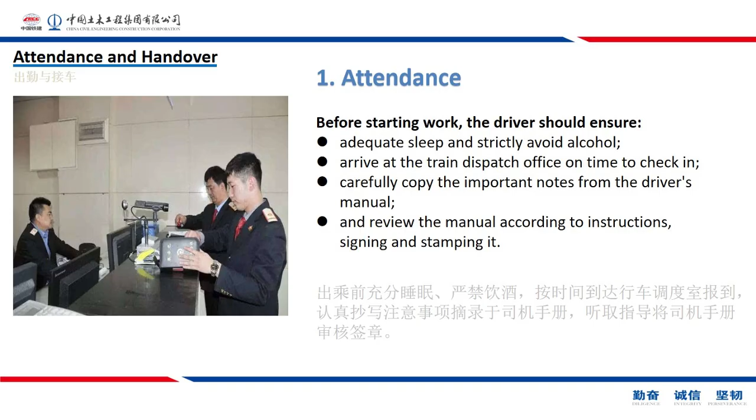Chapter 1, Attendance and Handover. Before work: sleep well, no alcohol or drugs that cause sleepiness. Arrive on time at the dispatch office and check in. Read the driver's manual, copy important notes as required, listen to instructions, sign or stamp the manual if needed. Be fit for duty: correct uniform, PPE ready, ID carried. Key message: start clear, safe, and on time.

When taking over the DMU: confirm the train is fully stopped and secured. Check all switches and air switches are in required positions. Follow the DMU inspection procedure step by step, do not skip items. If anything looks wrong, stop and report, do not move until fixed.

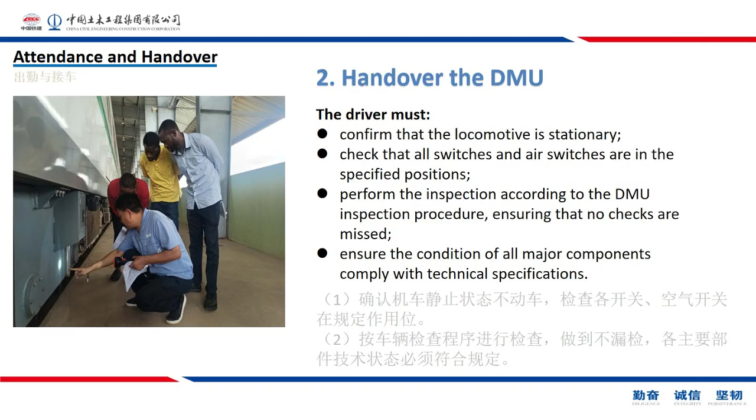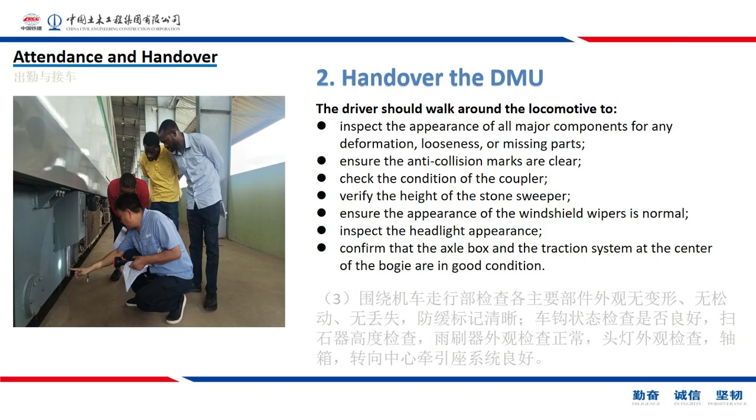Walk around slowly and look carefully. Major parts show no deformation, no looseness, no missing parts, anti-collision marks are clear. Coupler condition good, stone sweeper height correct. Wipers look normal, headlight lenses not broken. Axle boxes and bogie center traction system in good condition, no leak or damage.

Check primary and secondary coil springs and air springs look normal. Brake pipe joints tight, no leaks. Wheel treads normal, no big flats or cracks. Converter firmly installed, motor suspension good. Brake fan safe and reliable.

Diesel engine exterior normal, no fresh oil or coolant leaks. Compressor parts in good condition. Valve and switch positions correct per procedure. Confirm all levels meet rules.

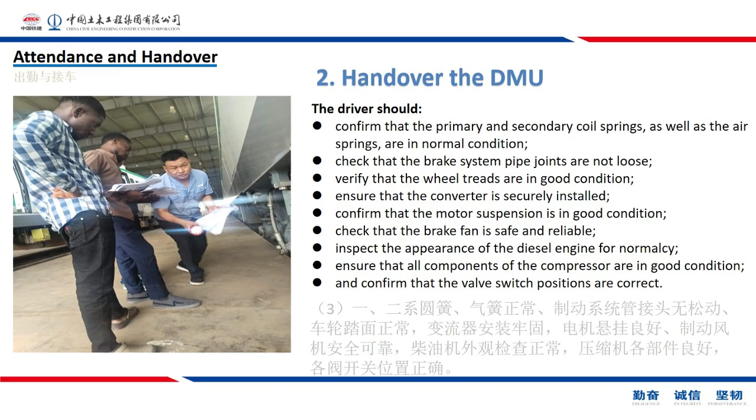Power pack lube oil between dipstick marks. Fuel greater than or equal to 300 liters. Coolant greater than or equal to 2/3 capacity. Hydraulic oil greater than or equal to 1/2 capacity. Battery box fixed firmly, cover locked.

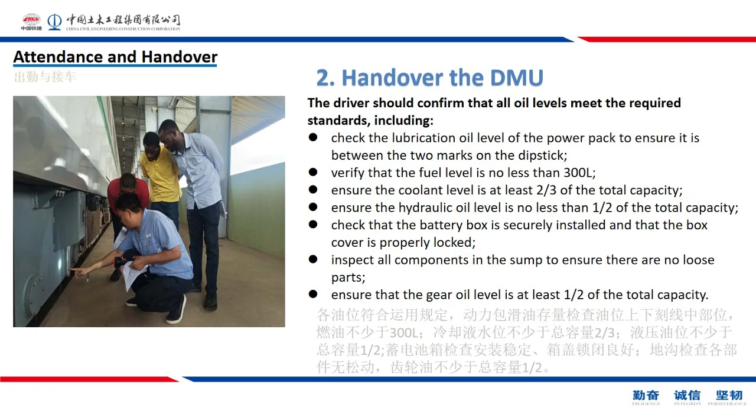Sump underframe parts tight, nothing loose or hanging. Gear oil greater than or equal to 1/2 capacity. If low, top up or report per procedure.

Chapter 2, DMU Functional Test. Battery activation: on the driver's cabin control panel, set the BATS power switch to on. Check the battery voltmeter, it should show about 108 volts. If voltage is low, follow the guide for charging or replacement and report.

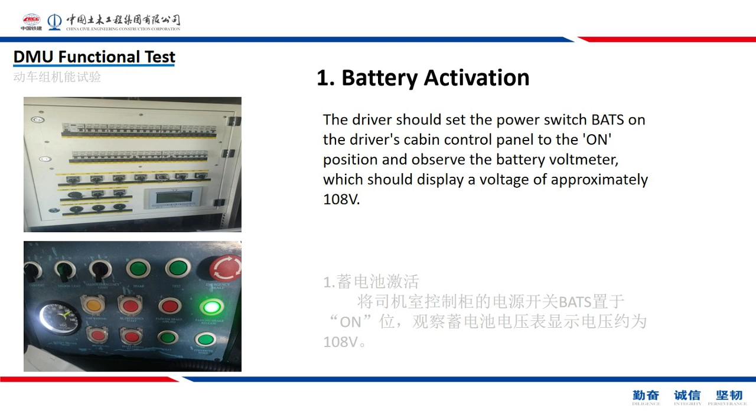Power pack self-check: wait about 6 to 10 minutes. Watch the TCMS screen, the two power pack icons should change from gray to blue. When the icons turn blue, the power pack self-check is complete. If the icons do not change or you see an alarm, follow the fault checklist and call for support.

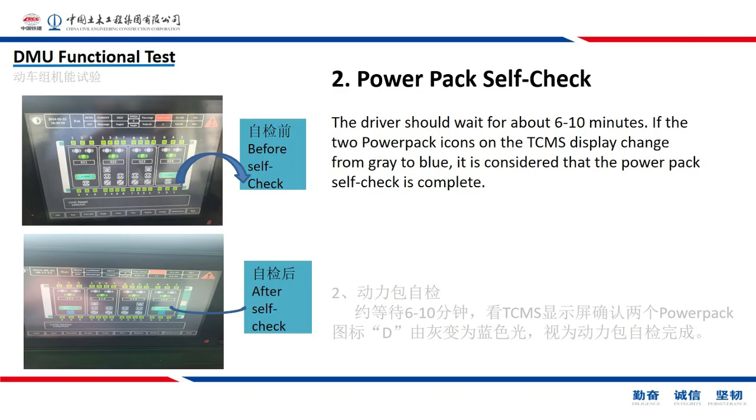Driver's cabin activation: insert the key into the controller key slot. Turn the key to on to activate the main driver's cabin. Confirm the cabin is now the master cabin on the TCMS.

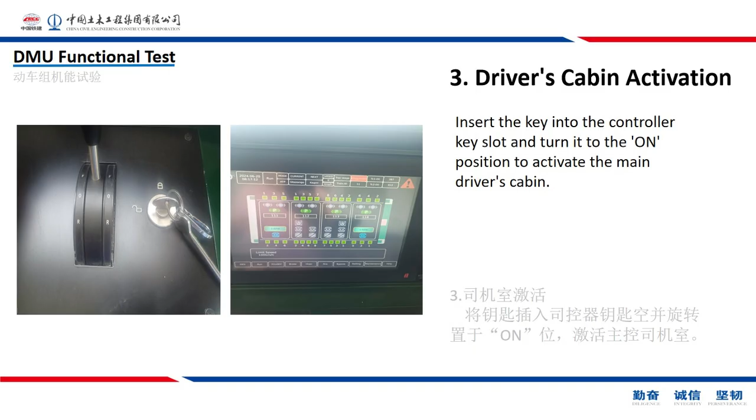Start power pack: press the Power Pack Running button on the desk. The power pack will start and stabilize. Look at the TCMS, the D icon should turn green. If it stays gray or shows red, stop and follow the fault procedure.

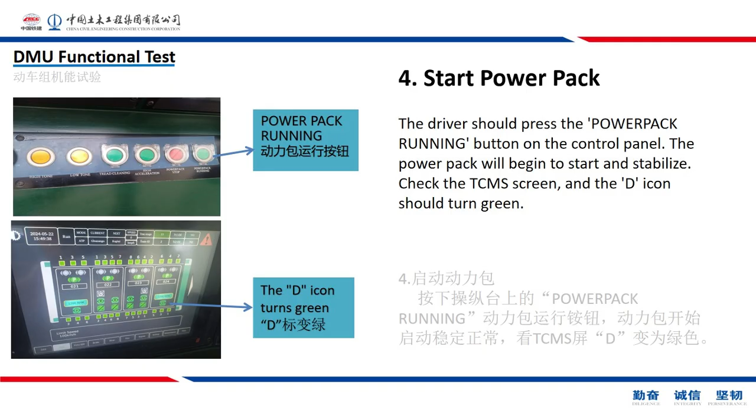Converter and air compressor. Traction converter: check the TCMS, the display should be normal. Air compressor: watch the air pressure gauge. It starts when total air pressure is below 7.5 bar. It stops when total air pressure reaches 9 bar. Listen for abnormal noise and check for leaks. Report if anything is not normal.

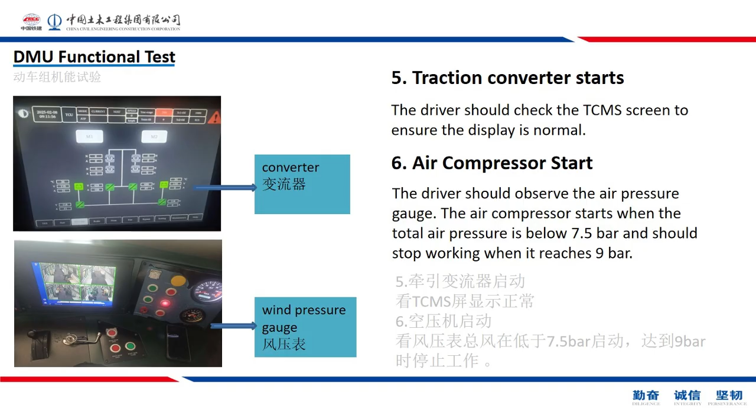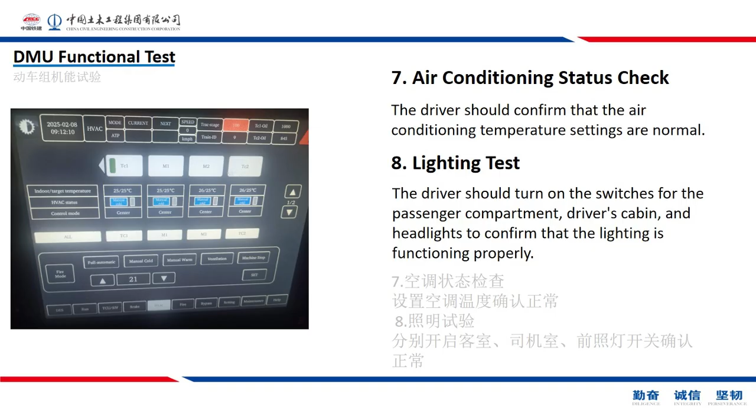Air conditioning and lighting test. Air conditioning: set a normal temperature and confirm the system response. Lighting: turn on passenger room lights, driver's cabin light, and headlights. Confirm all work and are steady. If any light is out, use the spare or report for change.

Wipers, broadcast, and doors. Wipers, switch on and confirm smooth movement and clear wiping. Passenger announcement, set LOT1A or LOT3 line and run a short test. The station program should play correctly. Doors, try the left and right door control. Confirm correct status indication and safe operation.

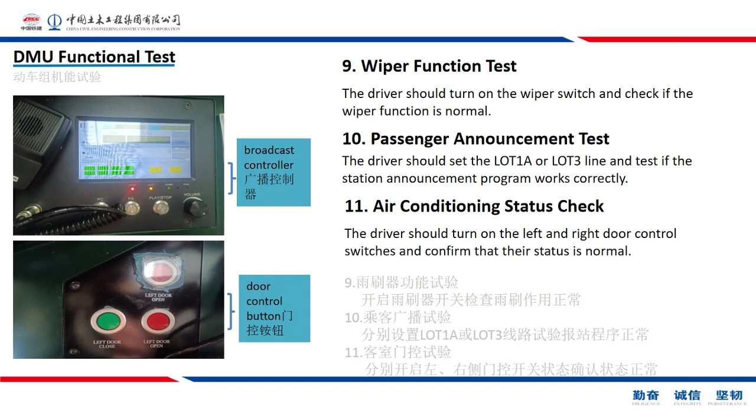Traction load test, preconditions and action. Before traction test, make sure door selection switch is in the middle position. Emergency brake indicator is off. All doors are closed. Parking brake is released. No brake failure is shown.

Then, change the direction on the controller as needed. Move the master controller to traction and to braking zones to test. Watch the current display and confirm it is within the normal range. If values are abnormal, stop and report.

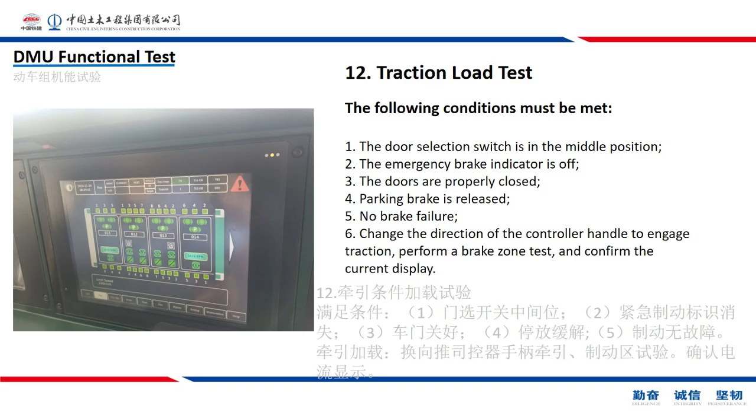Chapter 3, Entry and Exit from the Depot, Communication and Speed.

Contact the depot dispatcher. Confirm your route in and out of the depot. After receiving permission, sound the horn and move slowly. During movement, check that signals and switch points are in the correct state. Follow speed limits strictly. Workshop, inside the shed max 5 km per hour. Inside the depot yard, max 15 km per hour. Be ready to stop at any time if a person, vehicle, or tool appears.

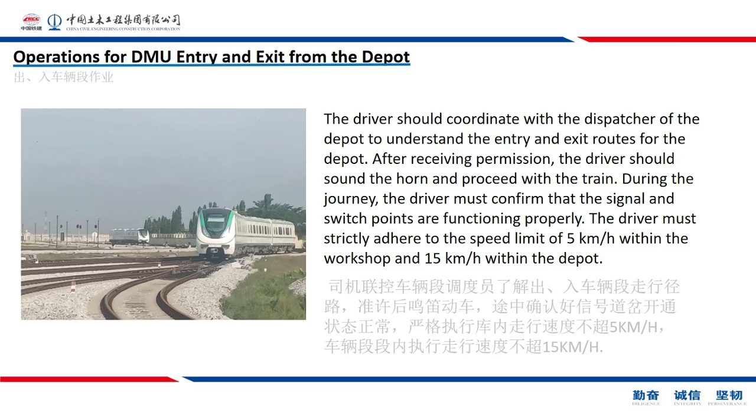Chapter 4, On the Line, Door Operations.

Before opening or closing passenger doors, look and confirm it is safe. Only open doors on the correct side and after the train has stopped. Watch the platform. If there are crowds or obstacles, wait and assist. Close the doors after boarding and alighting are complete. Confirm door closed indication.

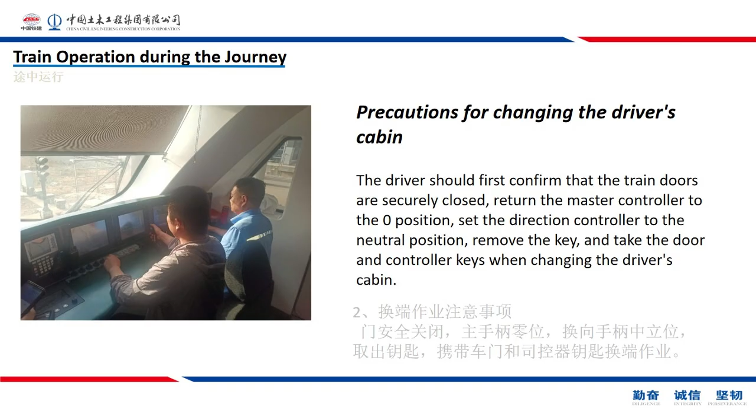Changing to the other cabin, turn back. When changing ends, confirm doors are safely closed. Put the master controller to 0 position. Set the direction controller to neutral. Remove the key. Take the door key and controller key with you to the other end. At the new cabin, repeat the activation steps and confirm master control.

Special sections and stations. Lot 3 line near DK25, there are many pedestrians, road crossings, and cattle. Reduce speed and keep it at or below 40 km per hour, use the horn when needed. Be ready to brake. Airport Terminal Station, the bumper is close to the stopping point. Keep speed in the station at or below 20 km per hour, stop smoothly and confirm a safe distance from the bumper.

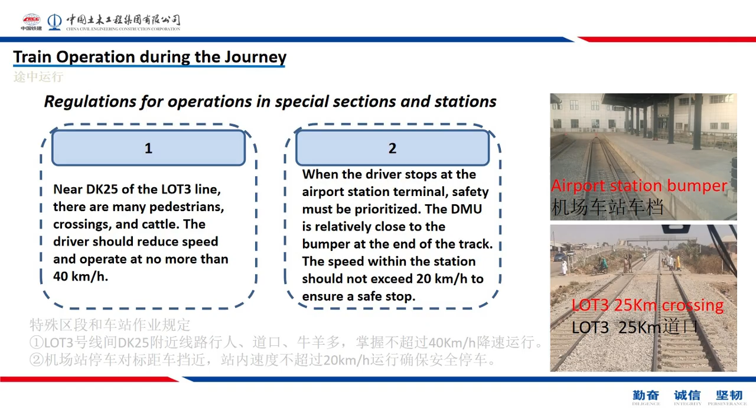Speed rules during the journey. Passing a turnout on the main line, side direction max 30 km per hour. When operating on all open main lines in the area, max 40 km per hour unless told otherwise. Passing a platform without stopping, max 40 km per hour. Normal main line running speed, 70 km per hour. On long or steep gradients, reduce speed early and keep control. Follow any temporary speed change from the dispatcher at once.

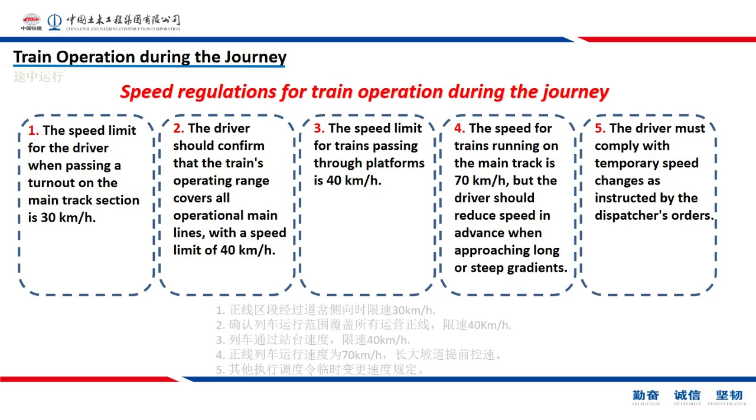Chapter 5. Shutdown in the workshop, securing the train. When the DMU enters the workshop and stops, do these steps in order.

Put the master handle and direction handle to 0. Stop the air conditioning. Turn off headlights and passenger room lights. Stop the power pack. Remove the controller key. Switch off the driver's cabin battery switch. Turn off cabin lights. Get off the train and lock the door. Report any faults you found during the run, and place warning tags if needed.

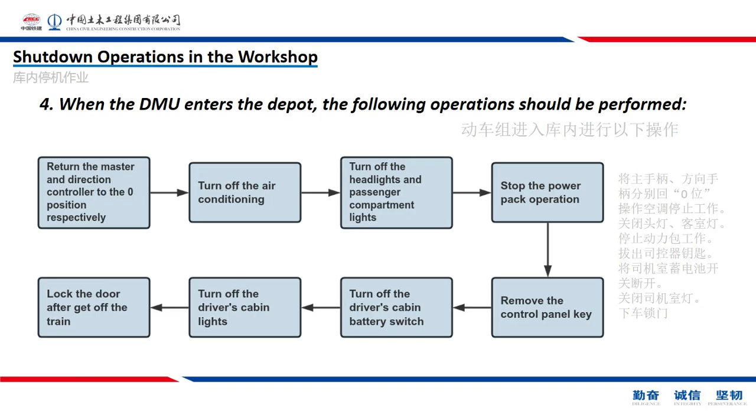Chapter 6. Off-duty work, records and handover.

When you finish your shift, fill in and submit the logbook form. Write clearly. Complete the record form for any special events, delays, or faults. Report the train's condition to the dispatcher or maintenance team. Hand over keys and devices as required. Confirm the next driver knows any open issues.